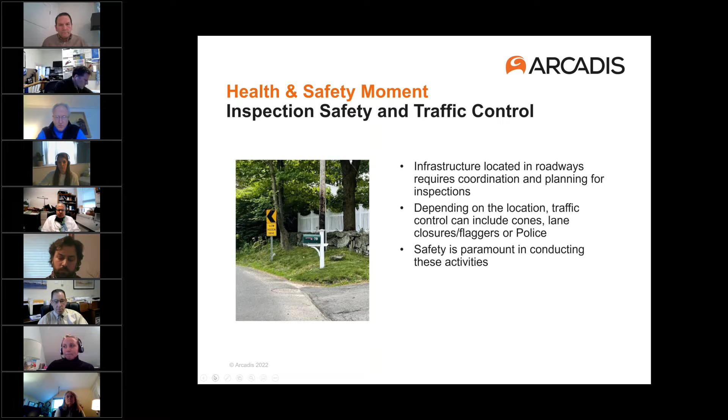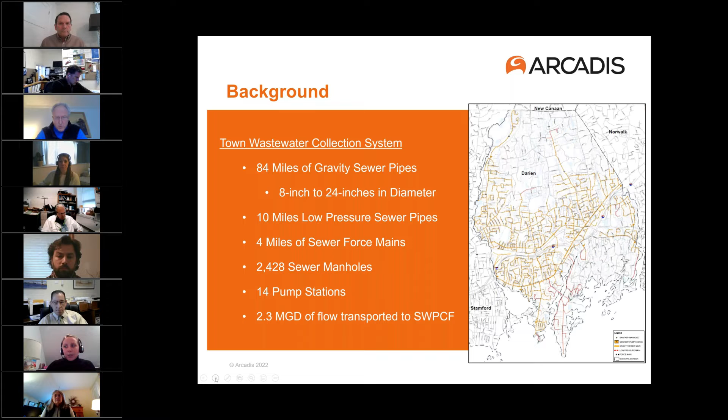So our current project, the I&I program, had several tasks associated with it. One being updates to the GIS system and some training for staff doing updates in GIS in real time, and that's ongoing. We're looking at capacity management, operation, and maintenance, or CMOM. That's another ongoing task. It's meant to be a living, breathing document with SOPs and emergency response protocols. And that task started with a series of interviews with DPW staff. So we're working on getting that CMOM document compiled.

Pump station evaluations. We did inspections at all 14 pump stations. That summary report document is complete, and I know a lot of the more urgent repairs are already underway, right? Anything that we noticed that really required attention, the town has jumped right on. And then really the meat of today's presentation is going to be the flow monitoring and I&I analysis work that was done. So the meters that were installed and the data that we got, and then the findings of the SSES investigations, right? And what everyone wants to know is, what do we do next?

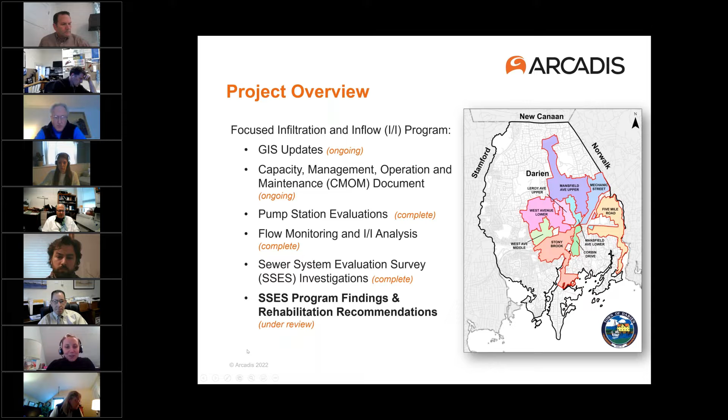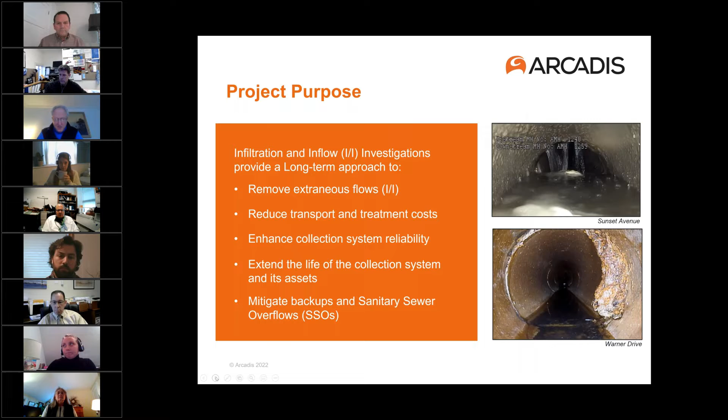So just to give some context to the purpose, why would you embark on a program like this? And I think everyone's well aware because you chose to embark on this program. But having an I&I project really gives you a long-term vision into removing extraneous flow in your system, which can reduce cost first and foremost, right? You're not paying for flow that doesn't need to be treated, that is not wastewater. It enhances reliability of the system, extends the life of your assets, and most importantly, minimizes any backups or SSOs. So with that, I'm going to turn it over to Lindsay to talk about the metering program.

All right, can everyone hear me? Yep. All right, good. Thanks, Vanessa.

As Vanessa mentioned before, it was about a year and a half ago or so, we did present the detailed findings from the flow metering program. So right now, we just want to give a quick refresher and summary of the findings that will lead into the SSES investigations and findings from that. So the first step of the I&I program was initiating a targeted flow monitoring program that really focused on the Stony Brook Pump Station sewer shed and the tributary sewer shed. This study area encompassed about half of the town's collection system, and that's what's shown in the teal color there. And it was prioritized due to the age and material of the system, historical issues, and system response during previous wet weather events.

The targeted flow monitoring program started in spring 2020, and it was during high groundwater levels. The flow monitoring was performed to determine the flow characteristics within the study area, so that we could quantify infiltration during dry weather conditions and inflow during wet weather conditions. So in total, 9 flow meters were installed in the study area, and metering was conducted for a period of 8 weeks. Also, 2 groundwater gauges were installed in town to monitor groundwater levels and fluctuations during wet weather events. Also, 2 rain gauges were installed to collect rain data, and that was used to identify sanitary flow increases in response to storm events, and then ultimately to quantify the amount of inflow in each meter area.

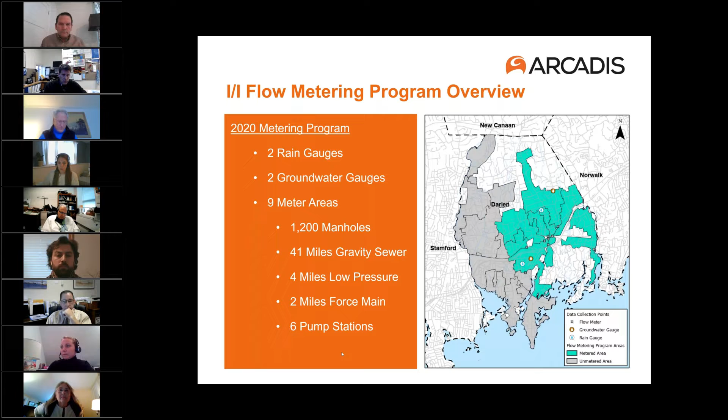So on the next slide, the results of the metering analysis were utilized to estimate the infiltration and inflow rates for each of the meter areas. Based on the results, those meter areas were prioritized to identify the high infiltration and high inflow meter areas. So in total, there were 6 meter areas identified to have either high infiltration, high inflow, or both, and that's what's displayed in the figure.

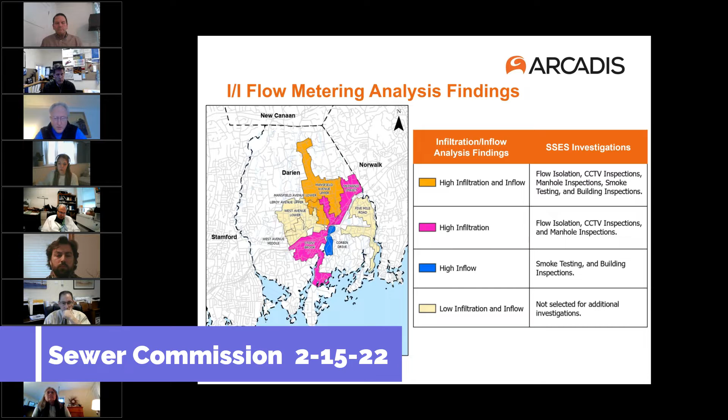So Leroy Avenue Upper and Mansfield Avenue Upper, which is also known as Brookside, those both had high infiltration and inflow, which is that orange color. Mansfield Avenue Lower, Mechanic Street, Stony Brook, those had high infiltration. That's that bright fuchsia color. And Corbin Drive was high inflow. And then there were 3 meter areas that were not identified to have high infiltration or high inflow, and that's kind of that yellow color. That's 5 Mile Road, West Avenue Middle, and West Avenue Lower.

So the meter areas with high infiltration and/or high inflow were recommended for follow-on field investigations, and that's as part of this sewer system evaluation survey. You'll hear us refer to it as the SSES. And that's really to locate and quantify the actual sources of the infiltration and inflow, and to determine the best course of action to mitigate that I&I, and also to remediate defects.

There's multiple field investigation techniques that are utilized as part of the follow-on SSES investigations, and those are really recommended and tailored to the type of extraneous flow present within the meter area. So as part of this SSES, 5 different field investigation programs were initiated to investigate those meter areas. So meter areas with high infiltration were included in flow isolation, CCTV, and manhole inspection programs, and meter areas with high inflow were selected for smoke testing and the building inspection program.

And I just wanted to quickly note that flow isolation is really like the first step in the field investigations for high infiltration meter areas. This is really because flow isolation is a cost-effective screening tool. It's used to isolate and identify the segments within that whole meter area that are contributing the high or excessive infiltration, and those segments that require the more detailed and more expensive investigations, which is CCTV inspections.

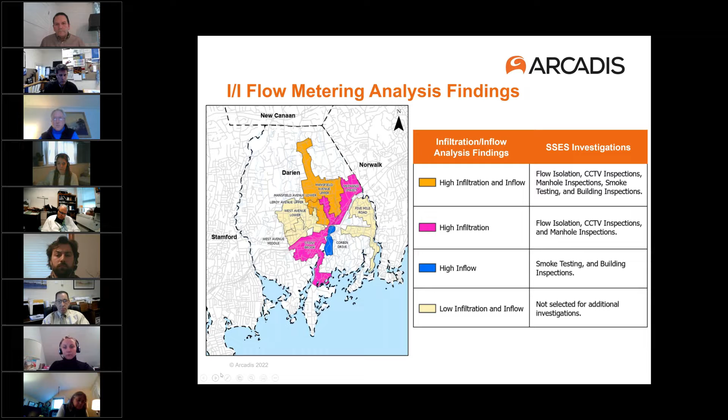And also similarly for smoke testing, that's another very effective field investigation method for high inflow meter areas. And that was performed in those 3 high inflow meter areas to identify possible inflow sources. And then the more detailed dye testing and building inspections were performed to confirm those inflow sources. So now we can dive into the SSES investigations and the findings.

So after performing about 100,000 linear feet of flow isolation in those 5 meter areas, around 47,000 linear feet, or almost 50% of that, was inspected as part of the CCTV program. So this does go to show what I just talked about, the importance of doing that initial first screening tool to really hone in on the areas that need the more detailed inspections.

So for those of you who may not be aware of what CCTV entails, it involves inspecting the inside of the pipe with a mobile remote-operated camera. And while it's inside the pipe, it drives along the pipe and it can pan and tilt to get a closer look at the defects and the features within the pipe. So as part of that CCTV inspection, the camera operator will stop at each defect and assign a NASSCO grade to each, which is an industry standardized rating system.

And you'll see in the columns on the right, we reference it there, but just so you know, 1 indicates minor defects, or it's in good condition, unlikely to fail in the foreseeable future, and 5 being severe defects that have failed already or are likely to fail, possibly within the next 5 years or so.

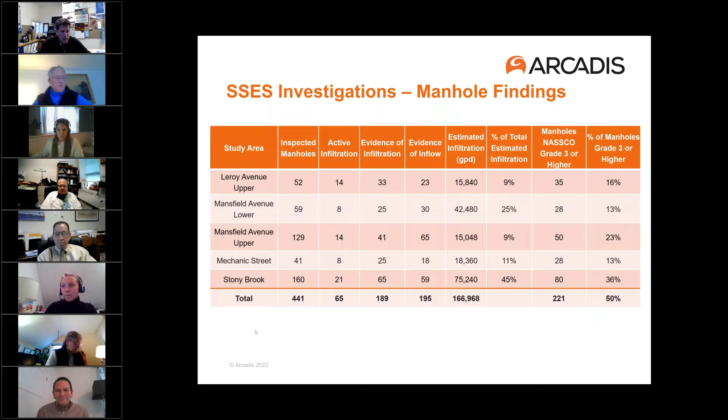Correct. Yes, the column heading should be different. It should say, percent of manholes inspected, grade 3 or higher. Because in the handout, instead of 50%, it says 100%. We did update that, yes. Okay. Thank you. Any other questions before we move on?

Okay, on to some scary looking pictures, but don't worry, these have been rehabbed. So I did mention, as we were going through the videos, or even when we were on site, we asked the CCTV sub and the manhole sub, if you find anything that needs immediate attention, please let us know right away. So some of these defects were identified right away, some during closer review. We did notify the town of these critical defects, and all of the ones identified here have been repaired or are planned to be repaired.

And I'll just talk through the pictures quickly. The first one is showing a significantly offset joint. There's not a lot of flow getting by there, with rocks and soil visible. There was also infiltration present as well. The middle picture is of a fracture in the pipe; it had probably about 10 gallons a minute of infiltration coming in there. And then the last picture is a partial collapse. There was a little bit of flow that was able to get by.

Luckily, this picture on the bottom was of a manhole where there's probably only a couple houses connected onto the line. So it was good that it was identified and repaired quickly so it didn't impact service to any of the residents.

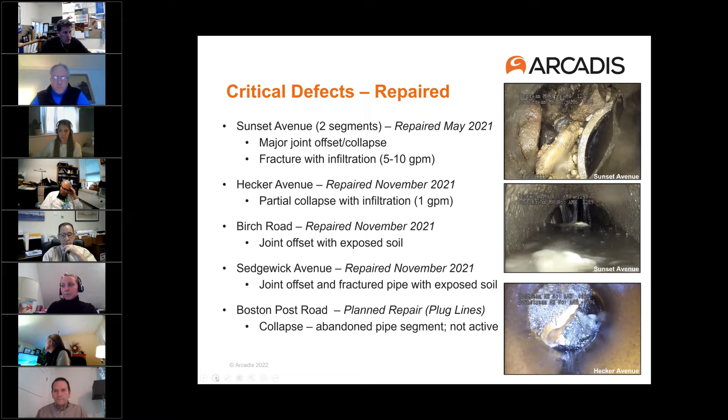All right, next slide. This is an area that we wanted to have a slide in and of itself. This is about Old Kings Highway South. It's in the Stony Brook meter area. This whole street had some critical defects. Starting at a manhole a little south of Andrews Drive, I believe it's the manhole that Vanessa had in her health and safety moment, and that's where the 5-mile pump station force main discharges. And then it runs approximately 3,400 linear feet, I think about 17 segments, to Boston Post Road.

All of the pipes and manholes and most of the service connections are deteriorating due to the hydrogen sulfide levels. This is because of the force main discharge at the top of this line. And it ranges from early stages to more significant deterioration, which is shown in these pictures. The top one is of the pipe that is delaminating. It's not the entire piece of pipe falling off, but a layer of it, due to the asbestos cement construction. That's what happens when it starts to degrade.

The middle picture is of a service connection. I know it's a little difficult to see, but when the asbestos cement starts to deteriorate, it also swells. So it's showing a little bit of the pipe swelling, and it's about to delaminate. And the bottom photo, it's hard to see, but it is showing some section loss of the manhole wall where it's starting to thin out and flake off as well.

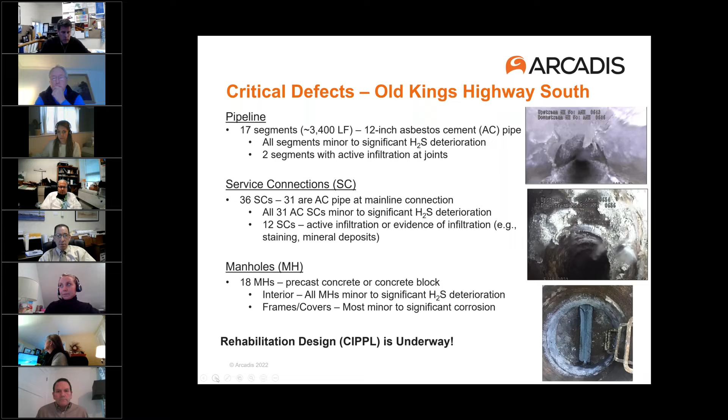Right. So next is the overall rehab recommendations, costs, and kind of the next steps. I'll talk on the rehab recommendations. We've taken a look at the SSES findings. I'm not going to go into a lot of detail on the process of the rehab analysis. That's kind of a whole presentation in and of itself.

We do cover that in sections 4 and 5, the analysis that we did to arrive at the rehab recommendations. But I did want to quickly note that the review wasn't done in a vacuum. While we did assess each pipe segment and each manhole, afterwards we took a step back. It's a holistic approach that was really taken into consideration to develop the overall cost-effective rehab recommendations program. So I just want everyone to keep that in mind.

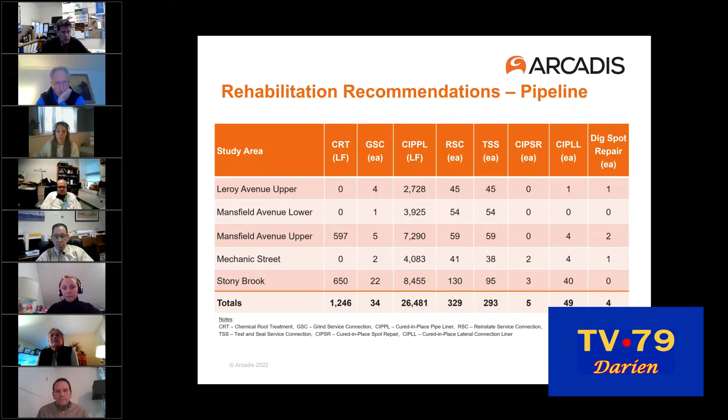So this table here is the summary of the pipeline rehabilitation recommendations for each meter area. I'm sure most of you are not familiar with the abbreviations and you may not be able to see the footnotes too well, so I'll talk through them from left to right. It's chemical root treatment, grinding service connections, cured-in-place pipelining, which is pipelining from manhole to manhole, reinstating service connections, test and sealing service connections, cured-in-place spot repairs, which is doing an isolated repair to a defect,

cured-in-place lateral lining, that's lining of a lateral. It can be either a few feet or upwards of 30 or 40 feet. And then dig spot repair, which is obviously in a location where you can't utilize a trenchless technology rehab method. Unfortunately, it requires excavation at that point.

So of the 5 meter areas, it's recommended that approximately 27,000 linear feet be lined manhole to manhole. This is to mitigate I&I, address structural issues, and improve system reliability. That lining quantity is about 50% of what was CCTV inspected, and overall, about 60% of the pipe segments that were inspected are recommended for some type of rehabilitation. So you can see a majority of the rehab recommendations are full pipe lining. Any questions? I'm gonna move on to manholes.

All right, on to manholes. Wait a minute, I actually have a question on this. Old Kings Highway isn't on here, that would up it, correct? The Old Kings Highway South? Cam, correct me if I'm wrong, but I believe that is included in Stony Brook. The work hasn't been done yet, so I believe that is still included in that total. Yeah, on this table, Old Kings Highway is actually within the Stony Brook meter area. It was during those investigations when we found out that H2S was pretty bad, and so we pulled that out as a critical area.

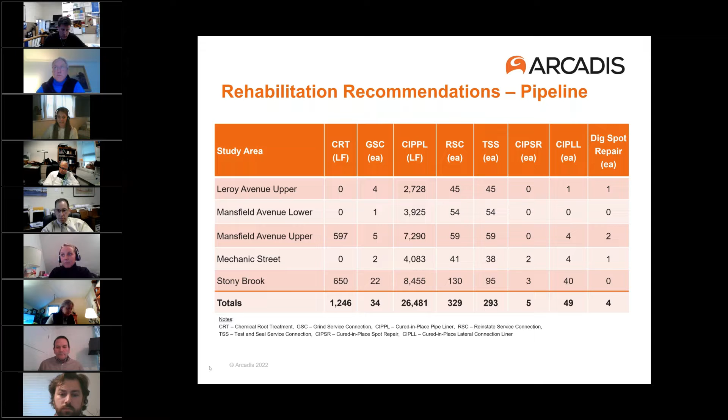Yeah, the Stony Brook meter area encompasses, I think, all the way from where Boston Post Road meets Leroy Avenue, all the way down to the Stony Brook pump station, inclusive of Renshaw Road, Park Place, all of that, Hecker, near the 95 on-ramp. So it's a big area. Okay, thank you. Yep. On to manholes.

All right, so for manhole rehab methods, we have frame and cover work, which could include resetting or raising manhole covers, or replacing the frame and covers with either a standard cover or a watertight frame and cover. There's chimney seals; about 2 feet below the frame is considered the chimney, and that's sealed. Cementitious lining is lining of the entire manhole; that quantity there is actually in vertical feet, not each manhole. Epoxy coating is recommended in areas with high hydrogen sulfide. That's a protective coating to protect the manhole.

Next is grout injection of the manhole. This can be done in isolated areas, just at the pipe connection, the invert, the wall, basically wherever that infiltration is coming in, or you can do basically the entire manhole. Typically, that's recommended more for precast manholes, and cementitious lining is for brick or block, due to the number of avenues infiltration can come in through brick and block. Compared to all of that grout, it's a much more cost-effective and long-term solution to cementitious line.

And then the last is doing any repairs to the bench and invert. So total-wise, it's not included on here, but of the 417 manholes that were inspected, approximately 226 manholes, or 54%, are recommended for at least one type of rehabilitation.

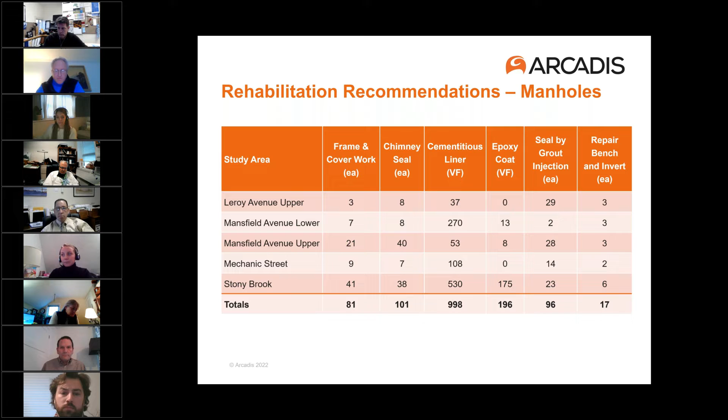All right, that's it. I'm going to hand it off to Scott now. I think this is probably what everyone's waiting for. He's going to talk over the rehabilitation cost estimate and preliminary schedule that we put together.

Thank you, Lindsay. Hi, everyone. Haven't seen you in a while, many of you.

The way we prioritized phases 1 through 5, 1 being first, 5 being last, was we used criteria that we typically utilize, and 4 in general were the overall infiltration rate in each of these study areas. You want to get the biggest bang for your buck as quickly as possible. So infiltration rate, the NASSCO ratings, you've heard Lindsay refer to a number of times. NASSCO is the National Association of Sewer Service Companies, I think anyway. I haven't looked that up in a while. But that's an association that came up with all these ratings and rankings and procedures for evaluating infiltration and structural issues in sanitary sewer systems. So again, 3 and greater, the more critical defects.

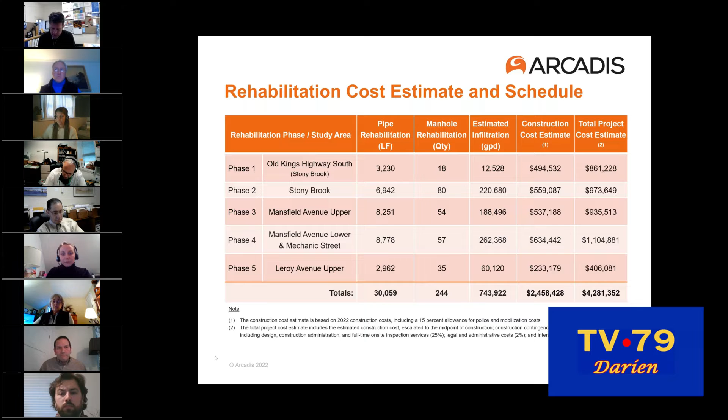But I think we did identify somewhere in this presentation, Lindsay, perhaps one of your slides, we didn't identify a whole lot of private inflow sources within the areas we studied. But that's not because they don't exist necessarily, Craig. It could be because we didn't get into the homes. I guess the one question: you have very specific guidance on properties where you were pretty clearly able to identify potential sources of inflow. But then there were like 100 and some odd properties that you categorized as suspected inflow.

And my understanding is that was just a cursory observation from the exterior. I'm trying to figure out what the follow-ups are on properties that have suspected inflow. So, who wants to take it? Smoke testing. It's yours, it's a hot potato. Yeah. So I'll have to check the exact number. 2.6.2. There we go. But most of those properties were visited as part of the follow-on dye testing investigations. So that 121 or so were flagged during the smoke testing.

That's because they couldn't see where the roof leaders go into the ground, the foundation drains, where it goes somewhere but we can't see the discharge point. So that's why that's a high number. And those are sometimes sources of inflow. So those were included in the follow-on dye testing. And I think most of those properties, except maybe 3 or so, were visited. The residential properties. Okay, so you did actually whittle down that list from 121 to 9. Exactly. It's a lot shorter. I think some of those suspect sources were also commercial flat roofs, and all but one or two were visited.

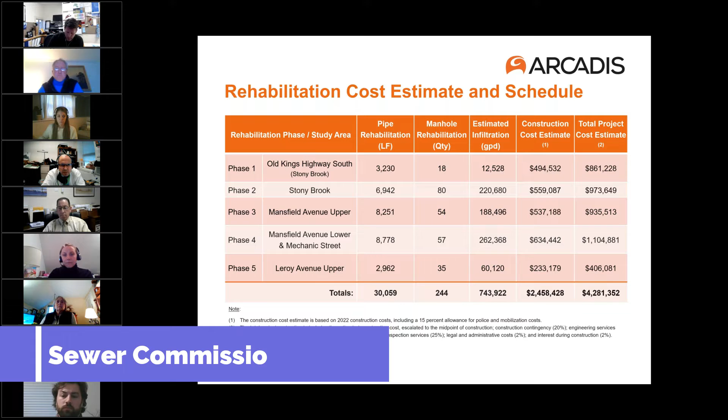Exactly. We've nibbled at that, and they're people's homes, and unless there's a reason to be invited, like a building permit or a sale or something else that triggers an event where a third party is able to put eyes on, it's difficult. Yep. You finished my thought. So, you guys have the data. Are you able to at least say, if this is an area we wanted to investigate in the future, here are the neighborhoods to target? Or do we make these improvements, do another flow test to validate them, and if we still have a problem in some of these high inflow neighborhoods, then that's the second step?

I think that's generally what we would recommend, because there is a lot of ordinance work associated with actually putting teeth to forcing people to disconnect sump pumps, and getting momentum behind that and the laws in place that make that possible. We would usually look at it in tandem. And the sump pumps are a big part of the CMOM process as well. Is there an ordinance in place? Is there a penalty or fine? So we'll continue to look at that with DPW as part of the CMOM process, but our advice is to look at it from a legal perspective first, work on your pipelining and infiltration, and then circle back to sump pumps as a continued conversation.

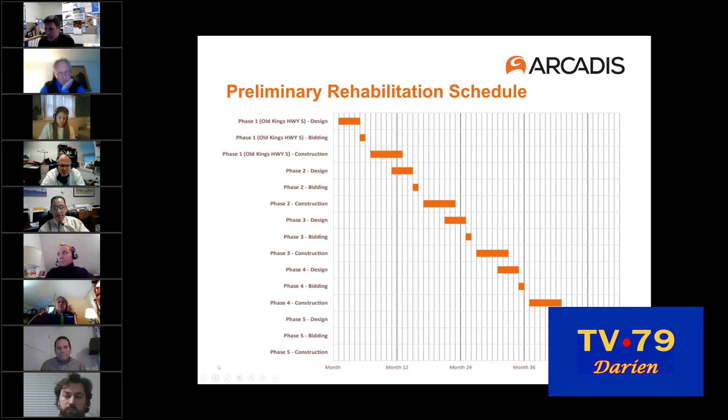I think Scott put together a very reasonable schedule. You do the design, you bid it, you construct it, and you hop through the phases. And I looked at the 48-month window, the 4-year window, and I said, I like conservative, but I just don't think that's going to fare well with our sewer commissioners, because I think they're going to want to do it faster. And I don't think you're wrong in thinking we can get this done a little bit quicker. It's going to entail a little bit more work, maybe a lot more work.

But I think you hit it right on by saying that right now is the time to strike, especially with the rates where they are for us. There is one more little component to the construction part of it. I really don't want to steal Vanessa's thunder with regards to the grant program that is possibly coming forward. I wanted her to speak on that, so I'm going to stop myself. Maybe she can give us a little insight to help you better understand the phasing and where the town could possibly get some additional funding.

I'd be happy to, and I'm actually going to skip to our last next steps slide because as we're talking, I thought it was really amazing. We touched on, I think, all of these without anyone being prompted. So the point about DEEP review and funding opportunities that Ed brought up is a good one, because there's a lot of momentum right now on the bipartisan infrastructure law, the BIL. And we're hearing that unlike ARPA, that money is going to roll through the state revolving fund, or Clean Water Fund in Connecticut, not be directed to towns specifically.

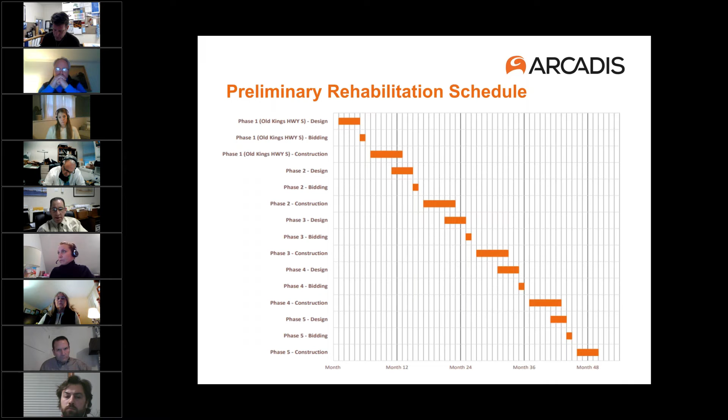Craig, I think looking at our bonding right now, I put in for $2.3 million for bonding. It was approved, and working right now on the agreement for clean water funds. So it appears that that money would be coming through. It leaves us just under $2 million worth of construction funds, where I think phase 2 and phase 3, if you use the total project cost estimate that Scott has shown here, is something we can cover with the bonding money that we have in place right now.

So it looks like we're going to get the ARPA funds for phase one. It still looks really good as of today's meeting. Phase two, phase three, it looks like we have the bonding already set in place for those two. So I think we have a really, really good start at this. But I like your idea though of making sure we lock the money in at a lower rate. It's a little scary right now.

So with that description, if we kind of went status quo in terms of where we're looking at funding right now, we would collapse 5 phases to 3 phases. So we would continue on with phase one, cross our fingers that it's going to be paid for with the ARPA grant. We would immediately follow on in the very near term with creating a contract package for phase two and phase three, with the other understanding that we have an RTM approved bond amount to cover that. And then the third phase would be 4 and 5.

So I have a question for the Arcadis folks. In putting these phases together, we go out to bid for Old Kings Highway South. That's going to be standalone. I want to get that out on the road to bid, get our lowest bidder in, get them under contract, get them started. So we take phase two and phase three. Do we bid them separately with maybe an opportunity of getting 2 separate contractors in here at the same time doing this work, or is that a little bit too much to handle?

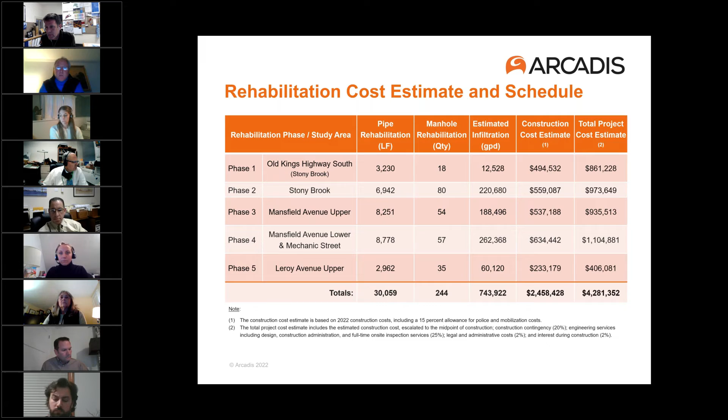So I'll open it up. The only remaining question is, so we kind of have a discussion going where we have 3 phases instead of 5. You know, in the back of my head, I'm still toying with 2 phases instead of 3, but I think I'm okay with 3. Any comments from the commission members on this discussion or the phasing or cost or how quickly to get this done? I agree with you that these are all projects that need to be done and should be done sooner rather than later, for the reason of the I&I, in my opinion, and for the reason that the bonding rates are good. So I would agree with you, Greg, that shortening the 48-month window is the way to go with all 5 of them.

Susan or Reese, any thoughts? I'm on board with it. Yeah, I am too, Craig. I think it would be nice to have a back of the envelope return on investment for every dollar spent. There's this much return at a 3%, 4% bond rate, whatever it would be, so that you could explain to the person on the street that this is money well spent. Immediately, we're lowering costs. Yeah, I mean, there's 2 components in my mind.

Look, in terms of phase 1, we found critical maintenance that has to occur immediately, and that has nothing to do with ROI, even though there might be a little bit, and everything to do with just keeping your system in good condition. But it would be interesting in terms of your estimated inflow and infiltration rates, what you think we would be able to knock down and what that savings would be in a year, just to kind of understand that calculus. Is it a 15-year ROI, a 5-year ROI, or that's not the way to look at it? I would actually be curious of the answer to that question.